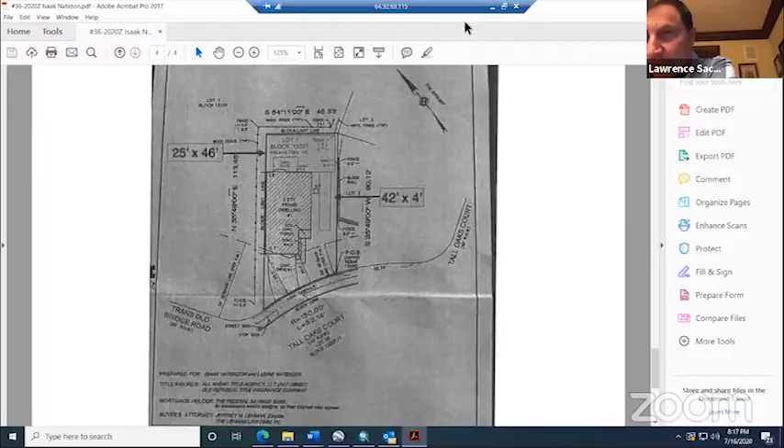Very true. I offer you that option as well, Mr. Natezon. How would that affect me, Mr. Sachs? If they do approve it, how would that fix it if there is a drainage problem?

Well, I'm talking about the fact that if your homeowners association is not concerned about protecting the 3-foot setback that's in this zone, more power to them. And I think that would be a benefit in terms of you proceeding forward with your application.

So maybe, honestly, that's probably what you should have done in the first place. You should have gone to the association. I have submitted an application for the same exact square footage that I applied here. I did apply to the homeowners association. And when are they expected to rule on that? When are they going to give you a decision? They haven't given me a decision, but I've been contacting them for a couple of months. Well, that's your other option. If you want to carry this for another month and come back next month and press the association for an answer, and if they say they're okay with the 25 by 46, I think that's compelling information to the board.

That's your call. If we do a vote today, what are my options if the board denies this? You would have two options. One is you could appeal that decision to the Superior Court of New Jersey. You would have 45 days from the date of the memorialization to do so, and you could have a hearing in front of a Superior Court judge to determine whether the board was arbitrary, capricious, and unreasonable in denying your application.

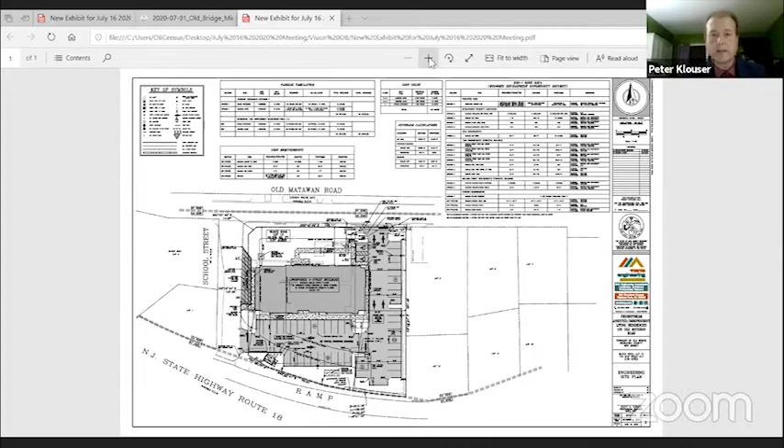We've eliminated... Peter, you went out. I'm not here, you stopped. When did I stop? At what part of my babbling did I stop? Peter, if you can hear me, you're frozen. I can hear you, I can hear you. I could hear Mr. Klouser just fine.

Okay, maybe it was me. Mr. Chairman Sullivan, where did I leave off? Well, just about 30 seconds ago, and all of a sudden you were frozen. You described all the benefits to the township, and that young professionals, perhaps people who were caretakers, would want to live there. That's kind of where I lost you right after that.

Okay, where I went from there, Chairman, was to the physical change to the site. We've reduced the height of the building. We've eliminated our parking variance that we were previously requesting. We've eliminated a maximum front yard setback variance. And in doing all of that, we've maintained all of the prior commitments to the board with regard to circulation on the site for emergency vehicles, the availability of the fire department connection where Mr. Hart believed it was appropriate, installing a hydrant on the site, and the loading and dumpster area.

I bring that up because in order to make the building a little more squat, to still have the assisted living facility, we didn't have to sacrifice our circulation around the building and the availability on site for those important safety measures. So the applicant has modified it, and has done so without sacrificing any of the prior commitments that were made, reduced some of the apartments, and is providing an inclusionary, affordable development on a piece of property that could use a little bit of rejuvenation in an area where it could use an injection of some redevelopment. So we're very proud to present this revised plan to the board.

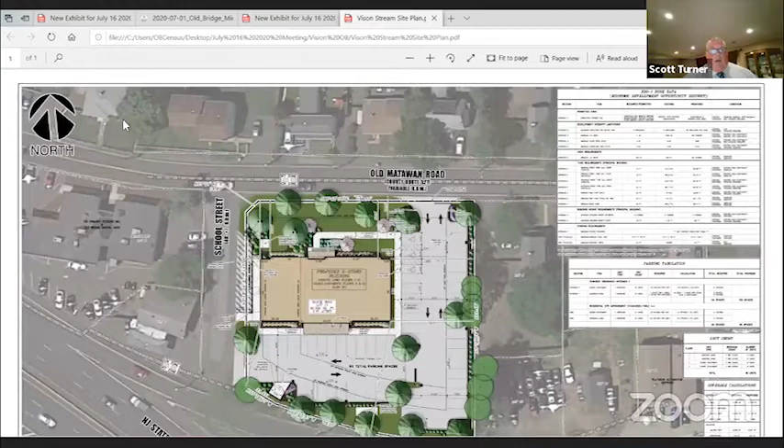Vina, if you have my revised rendering, if you could share that. Scott, I believe this is it, right? That's the only one I think we have. Okay, alright, there should have been a colored rendering, but that's okay, we'll use this. This is an exhibit that we prepared, it's an engineering site plan. It's revision number 2, dated June 10th, 2020, prepared by my office, and it represents the revision to the plan that Mr. Klouser just outlined to everybody. That's the old one, Vina, you can put up the black and white.

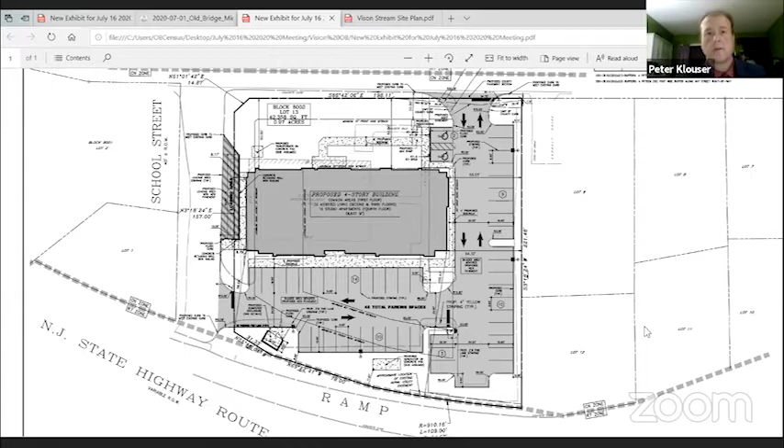Scott confused me. He said you're now going to have 48 spots, correct? Yes, instead of you're required to have 56. 56 was the prior site plan. When we had a 5-story building, we had 56 parking spaces provided. We've reduced that number to 48, so we now comply with the town standard, which is 48 spaces. Thank you, I understand it now.

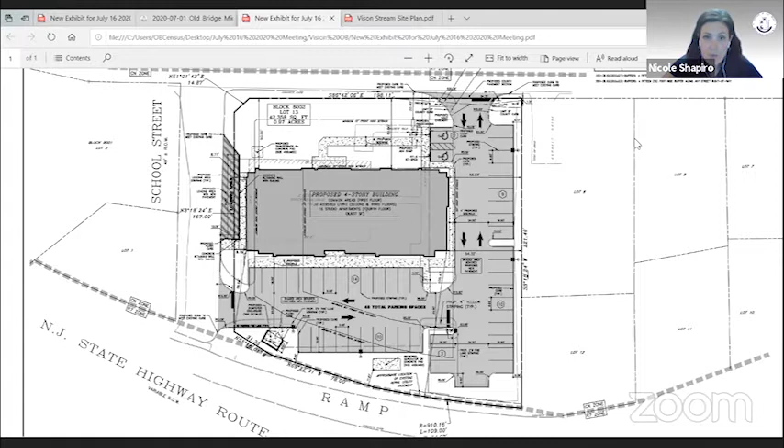Thank you. Mr. Lavallo, are you out there? Yes, Mr. Chairman. Does this change affect you in any way? No, the letter that I wrote on March 16th still applies to this, with the vegetation on the south side and the preservation of the large tree that's off property. That's pretty much it.

Okay, thank you, Mr. Lavallo. Fire Marshal Hart, are you there? Yes, I am, Jim. A couple of questions, Scott, from last meeting. Parapet, what's the height of the parapet wall? The parapet wall, from our understanding and discussions with our architect, will be 3 foot 6 inches in height.

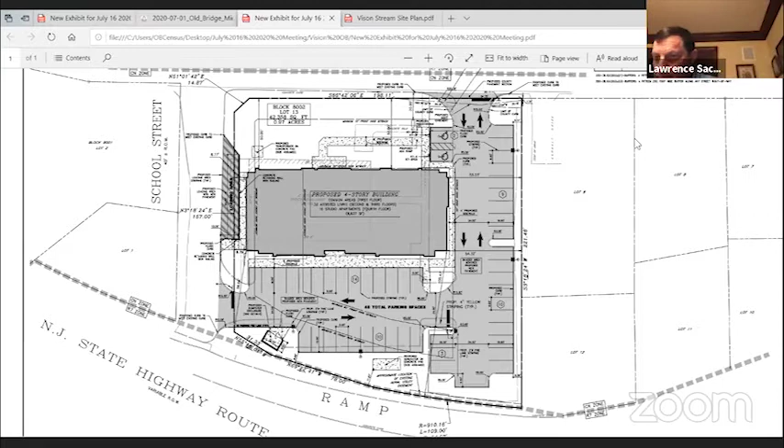Are the RTUs going on the roof or are they going on the ground? They're on the roof. Are we going to have the stair towers projecting above the roof, or are they stopping on the 4th floor with a ladder for the emergency access?

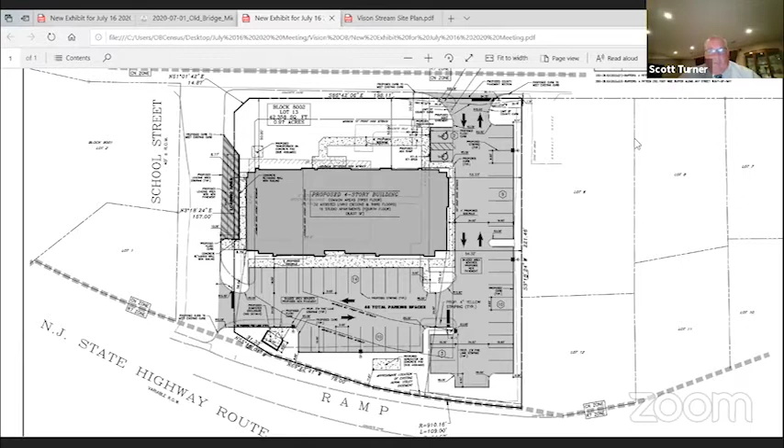My understanding is that it will stop and there'll be a ladder to access that roof. From the stair towers or from? Yes, from the stair towers, but if our architect needs to jump in to verify that, I'd ask that he do that, but that's my understanding. Well, that's the only concern I have, is about how we're gonna get up to the roof. Right, besides jumping over the parapet wall. Mechanically, how are they gonna maintain the RTUs on the roof if they can't get up there?

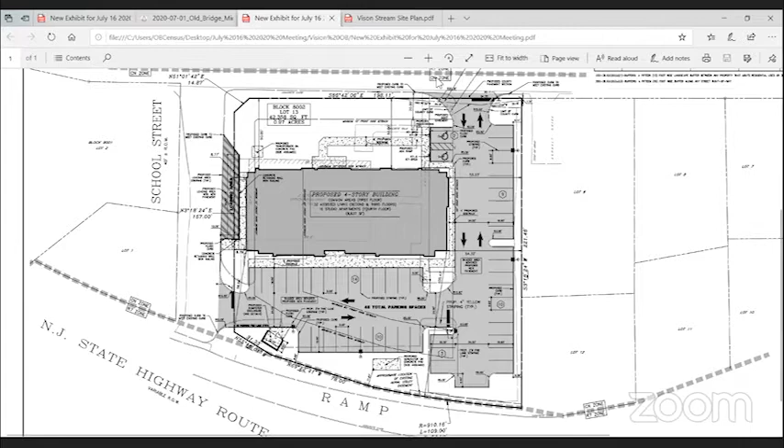But, all right, so 3 foot 6, that's the standard, right? I believe, correct. Okay, other than that, Jim, that's everything I was concerned about last meeting. So 4 stories is better than it was, so I'm fine with everything else. Thank you, Fire Marshal. Thank you, Jim.

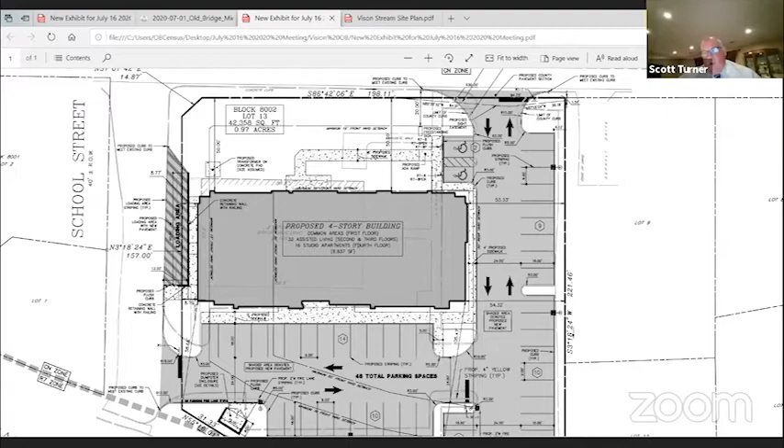That's all right. So Deanna covered the one issue I was going to bring up, which was the loading zone. Scott, the only question I have, and I can't see it on the exhibit, is the width of the sidewalk on the side of the building near the parking. How wide is that at the lowest point? Is that on the easterly side of the parking on the site?

Yeah, on the right side as you're seeing the exhibit. Right, so we have a minimum sidewalk width of 4 feet where it's just up against the curb line of the driveway, that's its minimum width. I think I'll defer to Nicole, but I think you're going to need a design waiver for that because the ordinance requires 5 feet. Yes, you would need a design waiver for that. Thank you, Deanna, correct. Other than that, that's all I have right now.

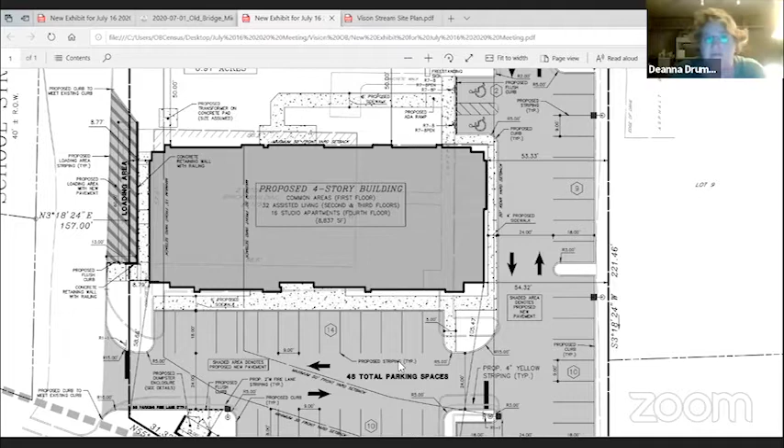Thank you, Ms. Drum. Larry, before I ask any of the board members, do you have anything for Mr. Turner at this point? No, I'm satisfied for now, Jim.

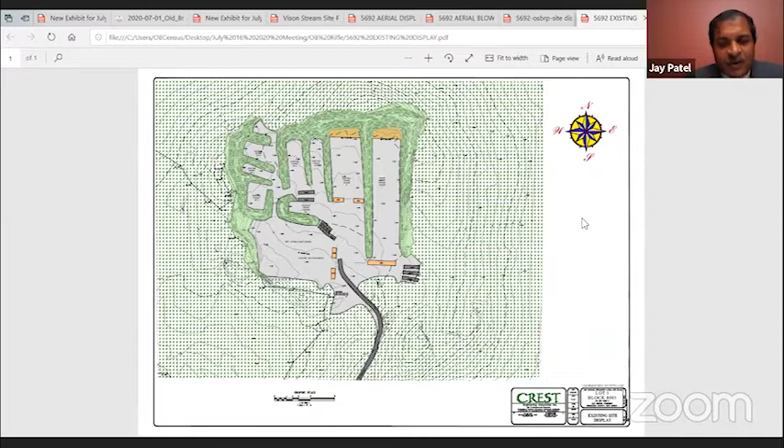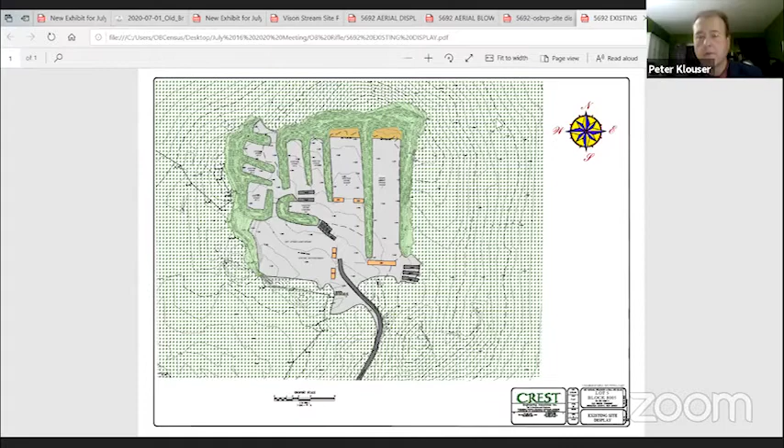Jay, if I could just interrupt, there's that gray snake that comes into the property. That's just highlighting the access road into the property, coming from Jack Brown Road. And then the gray rectangles we see, in case it's hard to read how they're labeled, those are the trailers on the site currently used, which Mr. Ball described in his testimony before. Correct, as to their use. The darker rectangle areas shown are the trailers.

Now we can see the lighter brown areas identified as the decks. Those are the stable standing platforms to be utilized as part of the shooting ranges. That is correct. And then you've noted on the plan grass, some stone. Depending on the time of year, as you indicated, the grass sort of grows through the stone and might have given the misunderstanding that it was actually grassed area, but it's really stone and it's going to stay stone.

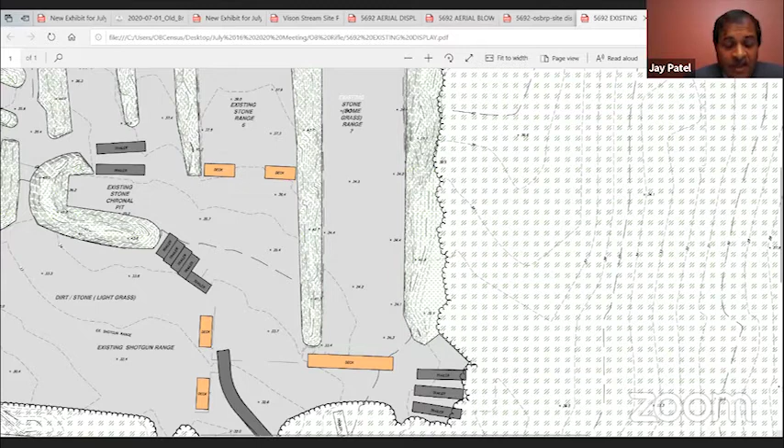And what you were indicating is that you're comfortable that you can update your stormwater management report to meet any of the applicable criteria, even though you're using stone now as opposed to grass as your coefficient. That is correct. So we are going to revise our plans as well as the stormwater calculations to reflect the existing as well as the correct proposed conditions.

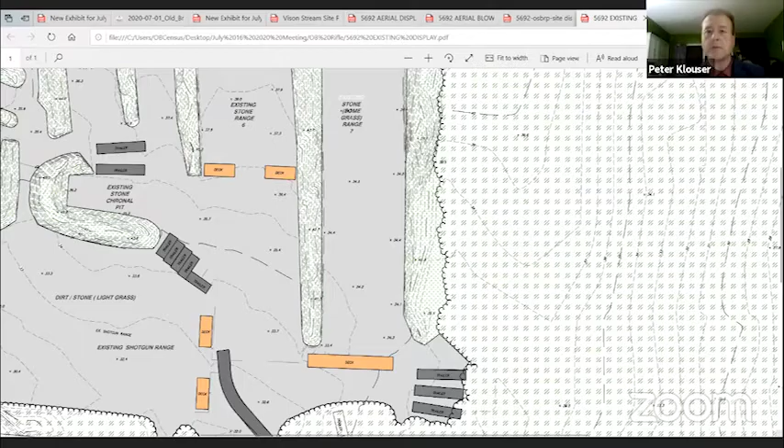And we saw the aerial photograph that we started with, and I don't think there's any need to click back onto it - all the board got to see it, and the public. That sort of supports the fact that it's very much centrally located on the property, right? That is correct. The property is close to 122 acres, and the 5 acres of developed area literally falls in the center of the property.

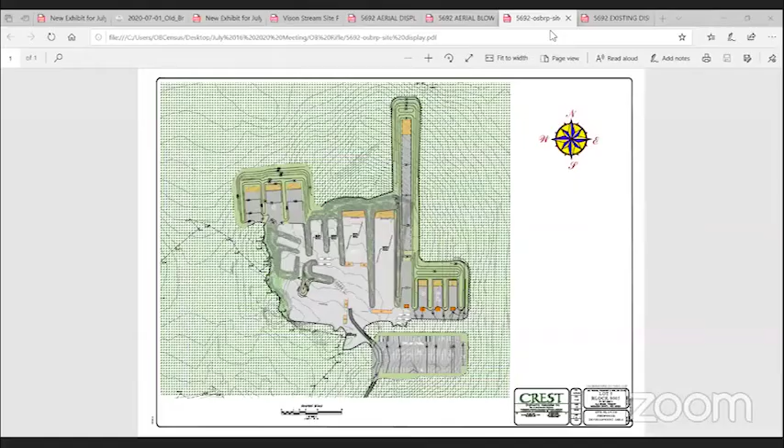So maybe it would be appropriate to move on to the rendering that shows the proposed improvements. There we go. Right, so in the center of the rendering here, let's mark this A2. Yes, A2. Thank you, Larry. A2 is a rendering of the proposed site plan.

So Jay, in the center is kind of what we were looking at before. Correct. And then on the left side, some of those ranges have been reoriented to the north to line up with the other ranges. Correct. And we've added some ranges on the right-hand side - those are the 4 new ranges that are part of this. That is correct. And then of course, the parking area.

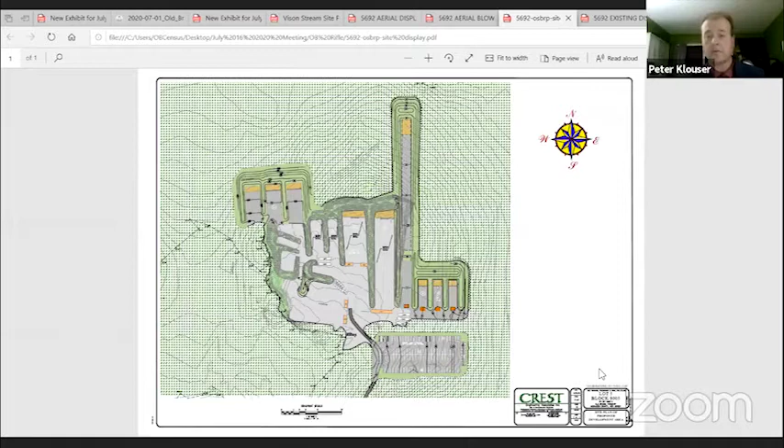So on the left, which you're looking at, the northwest corner, the 3 pits are reoriented. The new reorientation is shown, which will have the gravel cover. What you see in the yellow color is some 20 feet strip of dirt, and each one will be surrounded by the same configuration, like the end berms as well as the side berms, to provide safety as well as privacy.

On the right side, the long one is also a range, about 200 yards. And on the right side of that longer range, there are 3 instructional pits, which are the shorter ones. They are going to be similar to what I just described - the last 20 feet will be dirt, and the remaining portion of the pits will be gravel, with berm on 3 sides.

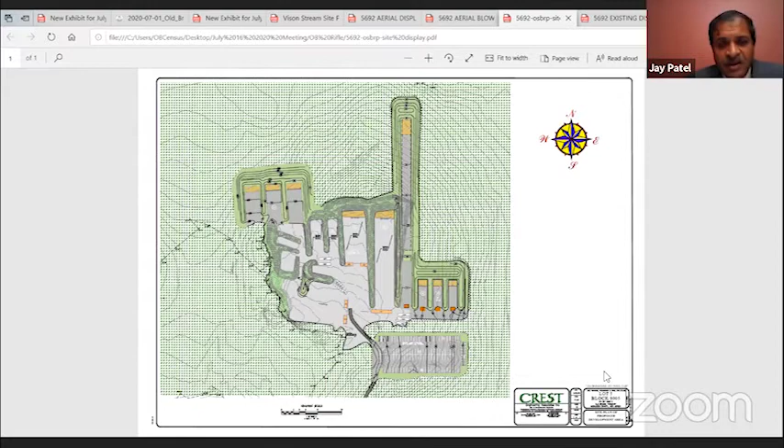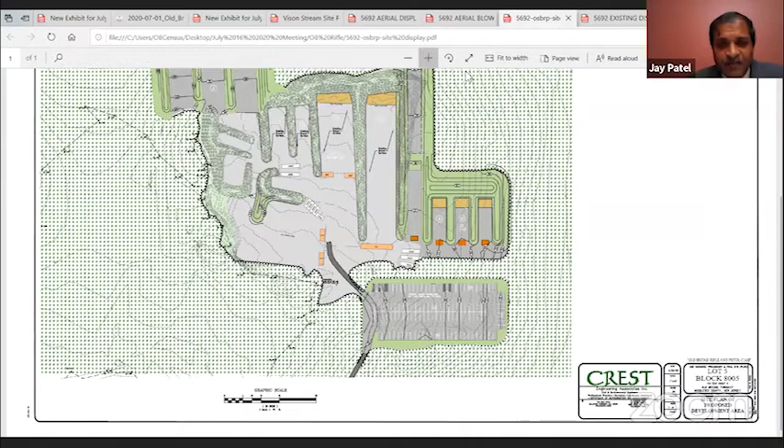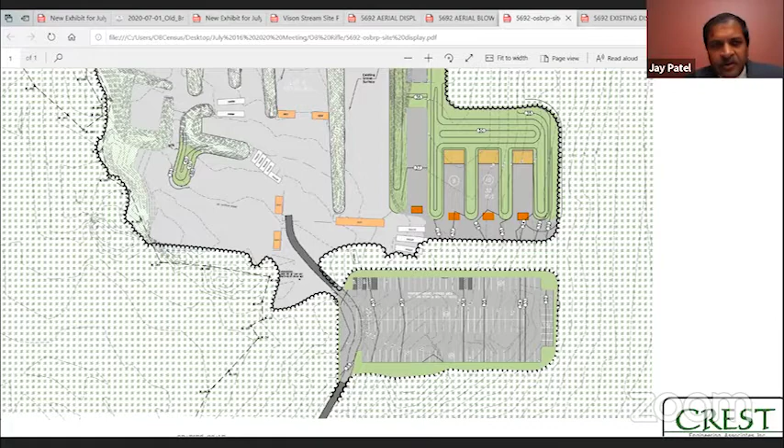Then we are also proposing the parking lot, which is coming on the lower right side, where the driveway is coming into the range area. The parking lot is provided with 120 parking spaces. The parking lot will be gravel. As we can just scroll a little bit further down.

The parking lot is located right next to the existing driveway, which will provide easy access from the driveway to the parking lot, and 120 spaces are provided. As required by ADA regulation, 5 handicap accessible spaces are shown in the darker gray areas within the lighter gray parking lot.

The parking lot is shown striped, but since this is going to be a gravel area, it's going to have concrete bumpers to delineate each parking space. From the handicap spaces, access will be provided through the woods with a stable, ADA compliant path to the ranges or pits.

There is some relief associated with the parking, physically. The parking lot stall sizes proposed are 9 by 18. And there's landscape standards in the ordinance for parking lots, and we're not applying those to this parking lot. The parking spaces are provided at 9 by 18 versus 10 by 20 as required by the ordinance, as well as there are requirements for landscaping islands and number and types of trees.

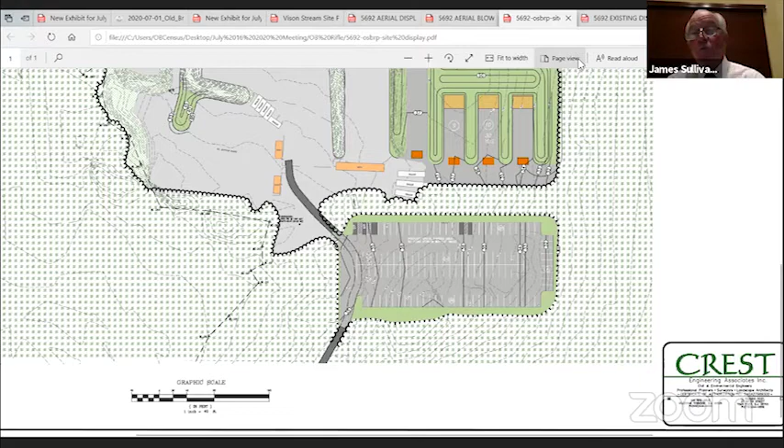Thank you, Mr. Klouser. What's the yellow representation at the end of each one? That's the backstop — that's a dirt area that they are using, and that's what it sort of looks like under the existing conditions. If you see a couple of ranges have the yellow, it's a dirt area.

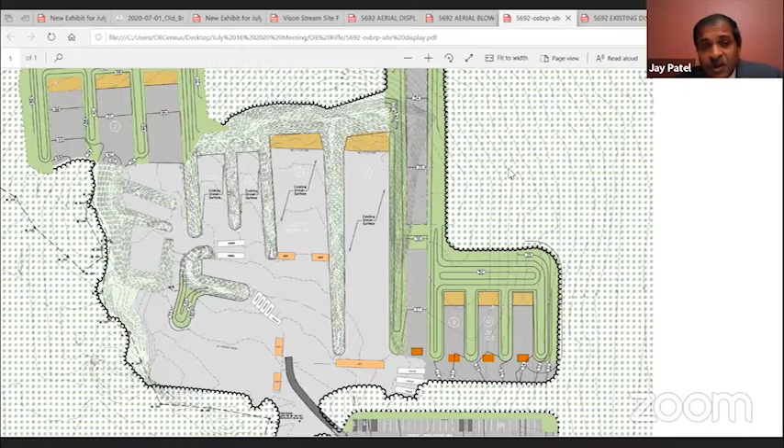We're showing a slightly different color because most of the surfaces, the range or pit areas, have a gravel surface, but the last 20 to 50 feet, depending on the type of range or pit, is dirt area. I'm referring to the yellow colors. Yes, is that the backstop? Yeah, that's the backstop. Correct, very good.

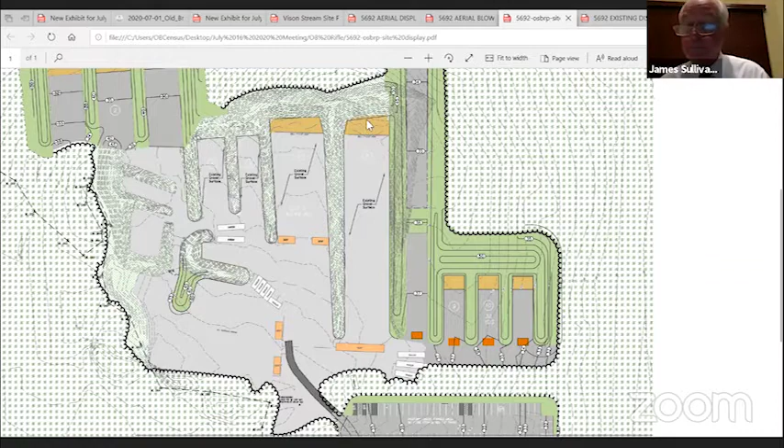Ms. Shapiro, you're up. Mr. Chairman, the engineer in his testimony did go through a lot of the engineering comments that I had. I do appreciate that Mr. Klouser put in testimony that they are widening the entrance driveway to meet the 20-foot requirement for fire access. I also heard that the berms will be created with excavation from the parking lots. However, I do ask that a note be added to the detail on the plans indicating that should there be borrow fill for the project, the source of the material be specified — I have general language, Mr...

Patel, I could provide you a note to be on the plan, because I don't want it to get into a situation where you're bringing truckloads of fill and then we're stopping you at the last minute. No, so we would appreciate that comment being added.

I'm just going through my notes right now. I do want to see a plan though, and I believe you indicated you're going to show the firm connection to the ranges from those parking spaces, because right now the parking for the handicap spaces doesn't make sense for the ones that are mid parking lot.

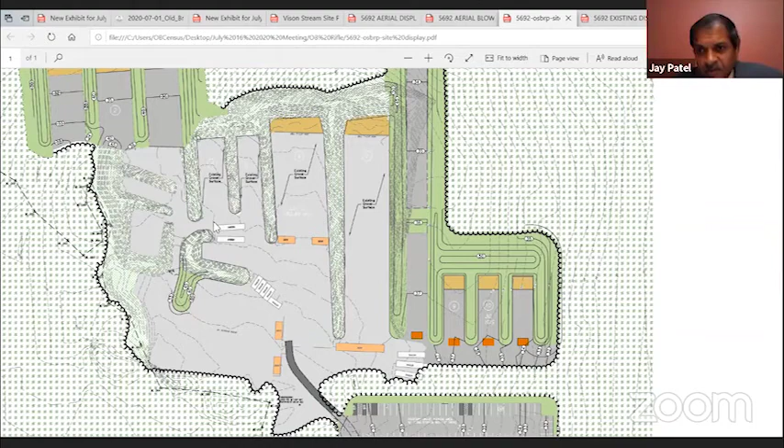As far as utilities to the site, what do you have there? Just electric? There is no electric too. Nothing, nothing. Okay, no power. And then I think that was it.

I just want to bring up one comment. I was speaking to Mr. Pucciarelli, who's the president of the Historical Society, and maybe this is for Mr. Klouser. He did say to me that you would be bringing up something to the board's attention to get on record. I don't know if now would be appropriate, but I just want to make sure I don't miss that opportunity to get that on record.

Yes, thank you for bringing that up. The gentleman at the Historic Society had contacted Mr. Ball about somewhere on this property there being some sort of a burial ground or graveyard related to the Brown family. It is remote from where we are talking, some 800 feet away.

I know Kevin went out and walked around there, and actually tomorrow has an appointment with the gentleman from the Historic Society to take him out onto the site and walk around. If any delineation is requested or required, we'd be more than glad to do that. I think they're looking at an old hand-drawn map, but it is significantly far away from the subject property. We're not interfering with that, but certainly as a courtesy, we're going to meet - not me, there's no reason for a lawyer to do that - but Kevin is going to meet out there with him tomorrow and walk around on the site.

Peter, if I could ask that I come up with a general note for your contractor just to be made aware that delineation will be made, and that piece, although let's say 400 feet or so away from the site, just so it could be identified, because I believe this little piece is mentioned on the state historic list as maybe an opinion or something. I have to go back and take a look. I meant to do that before tonight's meeting.

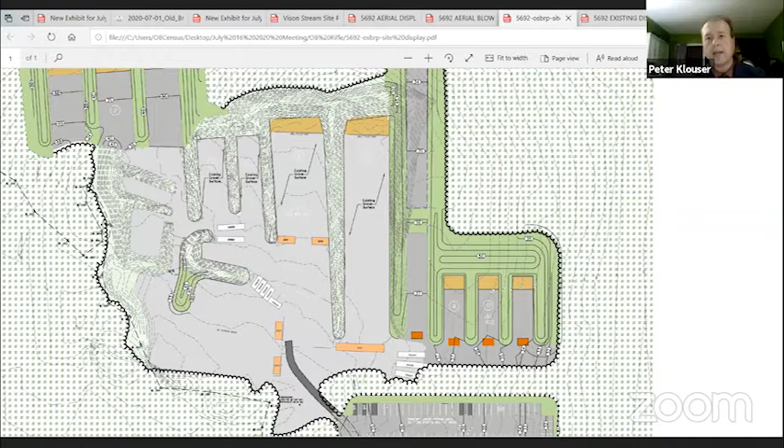But if it is listed as an opinion or something on there, I would actually note that on the plan as well. So let me do that research and then I'll provide you with a note for the plans, and the note with regard to the clean fill or whatever - both are acceptable. Absolutely.

Thank you. The only last thing I want to bring up is there is a contribution to our affordable housing. It's called a non-residential development fee for commercial development, and that's 2.5% of your equalized assessed value. I just bring it up at the board level because when you go get your building permit, 30% is required up front, and at your final stages, the rest is supposed to be provided as well, the final 70%. So I just want to bring your attention to page 10 of Vina and my review memo, in section K of the conclusion, just so you're aware that that is in the memo.

And that's all for me. Sure, understood. Thank you.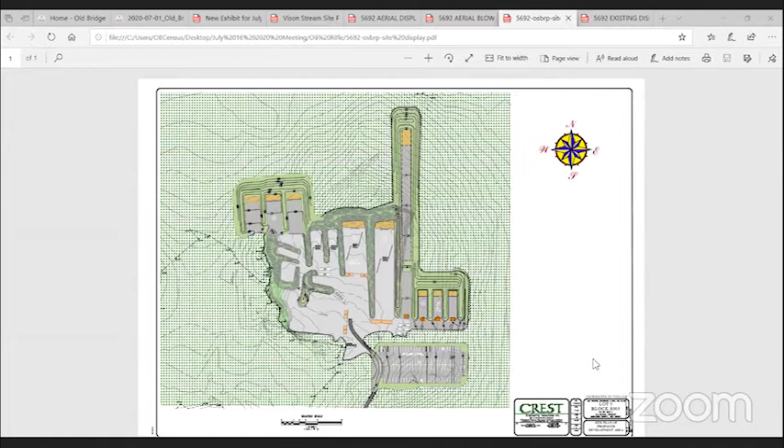So Mr. Sachs, you guys are discussing this today without even having demarcated on this visual where the ancient gravesite is? So this came to your zoning board meeting without even the appropriate things. Do you ever wonder why you're doing your job?

Well, first of all, if you listen to what Ms. Shapiro said earlier this evening, she indicated that there's going to be a notation on the plan indicating where the grave site is. There's been testimony that it's the belief of the engineer and of the Historical Society that the grave site is located probably within 400 feet of the range.

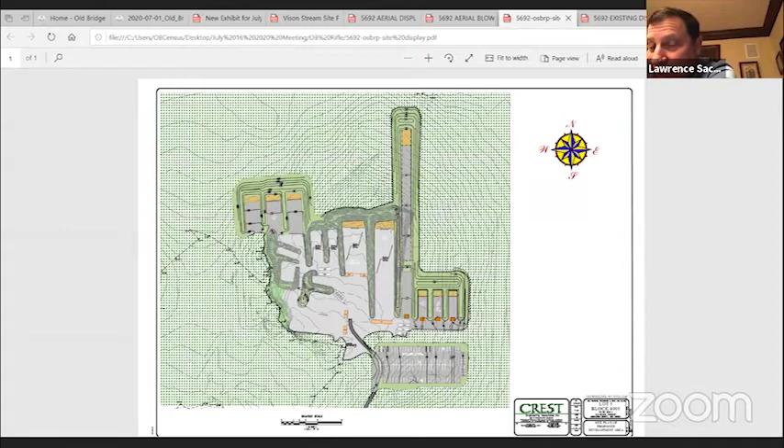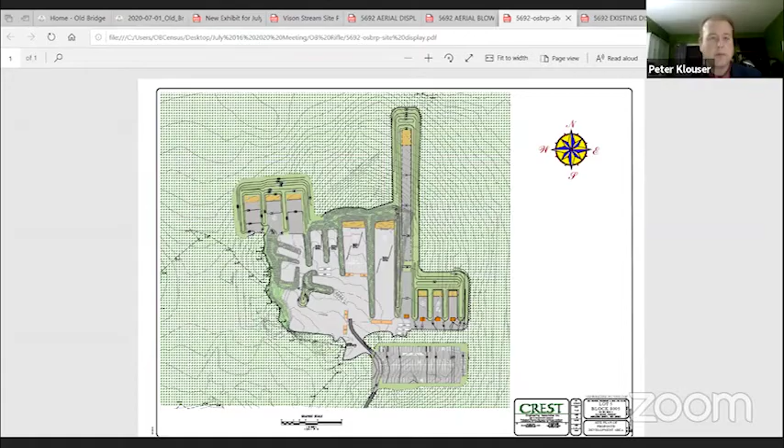Is that correct, Mr. Klouser? I think actually Kevin walked off with somewhere closer to 800 feet of the range. He's been out there already and seen it. And we will agree to provide a location of that to Ms. Shapiro and a note on the plan that it'll be protected.

Go ahead, Jeff, go ahead. So you're going to preserve the location of this historic graveyard, right? I'm not sure I understand the question. The question is, you're going to preserve the location of this historic graveyard, correct?

Wherever it is, we're going to identify it on the plans with a note that it'll be protected. Okay, so let me ask you a question. If I was hiking over to check out the graves of this historic site, would it be trespassing? Would it be in the firing range of the people, the direction of the guns? I mean, are they going to be shooting over where these dead bodies are?

It's private property. You shouldn't be hiking on it. So why are we protecting this historic property then? Why don't you just move the dead bodies to some other place? I mean, if I can't visit a historic graveyard, I'm just asking the question because you guys are saying I have to ask a question.

I'm just asking the question. So we can't visit the site. You're going to get it demarcated on the plan. You think it's less than 800 feet from the parking lot that you're going to expand. And you're not going to tell me whether or not you're going to protect me as a private citizen visiting a historic site in Old Bridge, New Jersey, right?